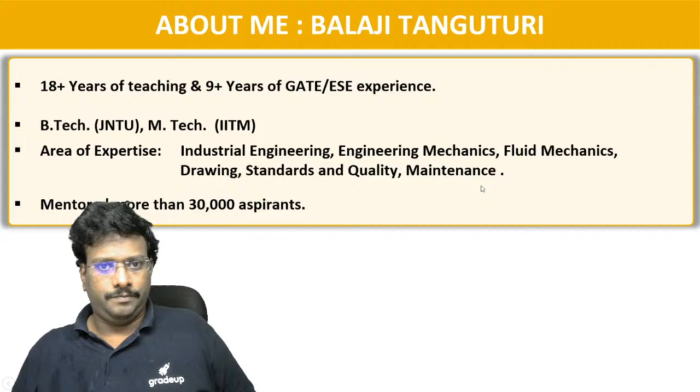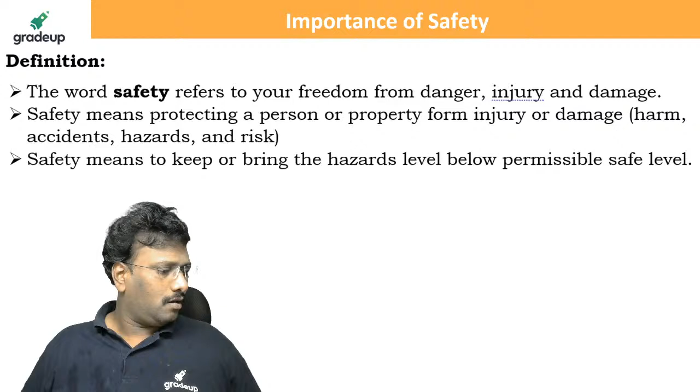Now first of all, we will move on to what is safety and where we are going to concentrate on these. What is safety? So just now I gave the information, just observe it.

So just have a look into this particular thing here. Safety refers to freedom from danger. Where the safety elements are required, we will discuss everything in this session, because I hope this part is going to be more or less related to the current situation in our world. So that is freedom from danger, injury and damage.

So danger is nothing but, just now you can observe, we are having a fear whether we are going to face a problem with COVID, it may lead to death also. So that is a danger we are going to get living in society.

Next one is injury. Whenever we are working under a particular organization, whether it is related to machinery or if it is a construction site, if you are not going to have proper safety guardings, then automatically it may injure the person. And in other places also, if you consider mining, if they are not going to make proper precautions as well as proper working conditions, it may cause death also. So all these things will come under safety.

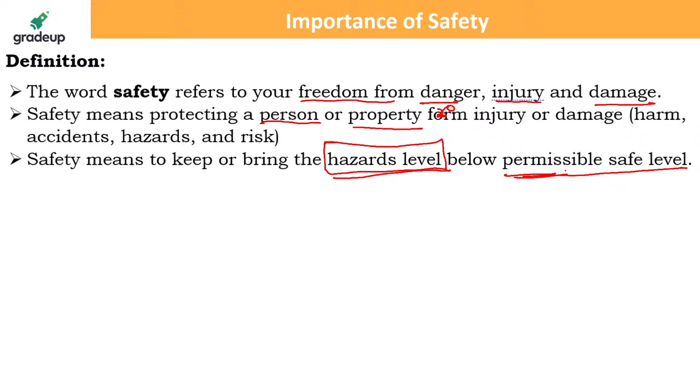So that is why we require that signals should not cross the allowable permissible value. So this is also considered a hazard which should be below the permissible safety level. Who can decide these safety elements, we will consider in the next few slides. So safety means keeping the elements, bringing down the hazard levels to a permissible level or below the permissible level. Now what are the various hazards we are going to consider?

Hazards are any source of potential damage which can cause potential damage or harm or adverse health effects. It is going to give permanent effect. Even you can observe the Bhopal gas tragedy is also one of the examples of it.

Adverse health, the health of the people are going to be affected. It is considered as a hazard on something or some person. So it is related to the environment, damaging the health of the people. Hazards are going to damage people, or the environment, or some particular equipment. It will affect or harm or damage someone or something. 'Something' means non-living things, 'someone' means living things, whether human being or non-human being. All these things we have to consider.

What are the various hazards we are going to consider? Just I am going to show some of the hazards here.

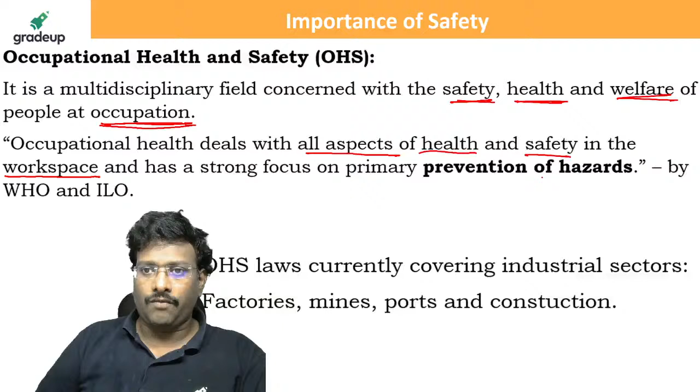Occupational health deals with all aspects of health and safety in the workspace. The major aim is a healthy workspace. The first priority is safety, the second priority is health. Both have to be considered, but first priority is given to safety, then we consider health also. That's why occupational means working environment.

It is for the primary prevention of hazards that are going to damage the people. Is it clear? Now, which industries currently come under OHS, occupational health and safety?

We got one question on this in a previous year ESE paper: which of the following industries does not come under occupational health and safety? Factories, mines, ports, and construction come under this, but they also gave agriculture as an option. However, agriculture so far is not considered under occupational health and safety. That is why wherever the word agriculture appears, that is the wrong answer in that paper. So remember, factories, mines, ports, and construction - these four are considered under the OHS law.

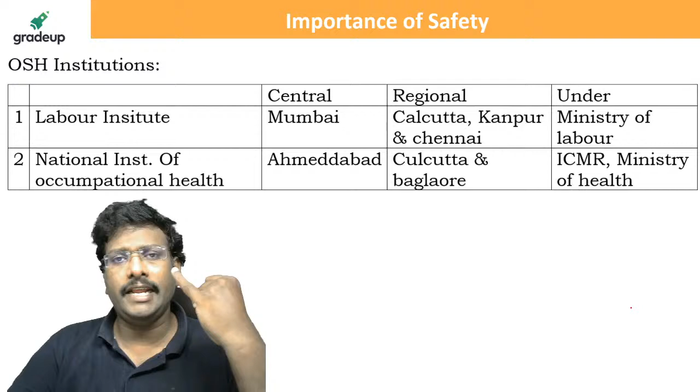Now, occupational health and safety is responsible for taking proper guidelines and forming rules for people working under various industries. Two things are there: one is related to the workers, another is related to their safety. Workers' basic needs in the working environment are taken care of, and rules are formed by the Ministry of Labor. So occupational health and safety comes with two units: one related to occupational safety, which comes under the Ministry of Labor.

Ministry of Labor, here the safety is going to come under occupational safety, it will come under Ministry of Labor. This Labor Institute office, the central office is located in Mumbai. Regional offices are there in Calcutta, Kanpur and Chennai.

And what about the health related things, they are going to be taken care of by the ICMR, Ministry of Health. You can observe whenever they make the COVID treatment, because one wing of ICMR is related only to occupation, but remaining wings are also there considering people's health. That's why if you observe, as per the ICMR guidelines, we are giving the treatment for COVID, meaning they decide what steps have to be taken, what treatments have to be given, and what insurance and medical policies the industries have to follow. All these things come under occupational health.

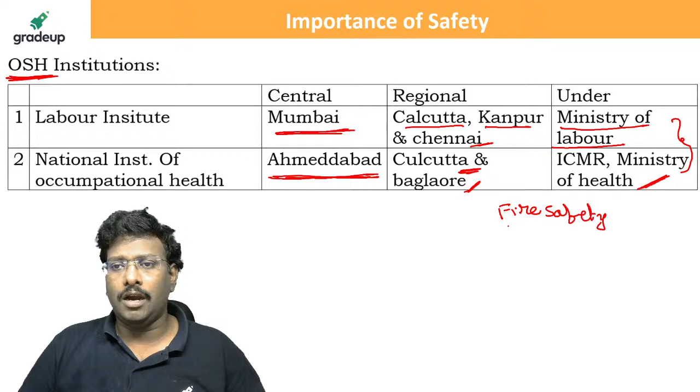First and foremost thing is fire safety. This is related to factories, minings and ports. Similarly, in construction also the safety is required, because most of the times you can observe accidents occurring at particular construction sites. People are injured because if they don't maintain proper safety precautions in construction, it may cause loss of physical elements like hands.

They are going to be injured, head injuries will come, or there is slipping on the floors and electrical shocks. All these things we can observe at construction sites.

If it is a fully completed building, electrical wirings are going to be inside, so no problem. But once it is open, if people are going to work under it, they have to work with electricity. The wires are not fixed, they are flexible, so once some particular insulation is damaged, it may cause electric shock to the people working in the area. That is why in construction work, we consider safety elements the most.

And while demolishing, in all these places safety is most important. First of all, we consider fire. Even if you consider colleges or buildings, even if it's an old building, nowadays in order to get permissions, they ask that fire exit should be there. If fire safety equipment and provision is not there, they are not going to give approvals.

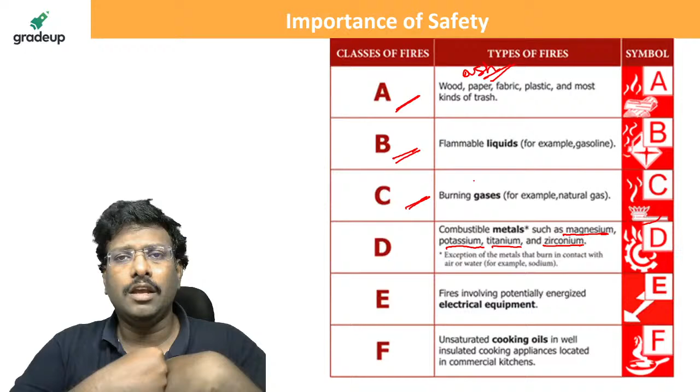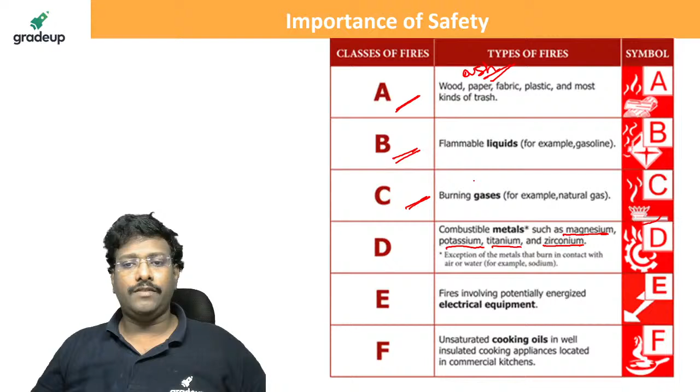Next one is E, the name itself shows electrical. So once, due to electrical shock, if the fire starts, or otherwise the fire is in the electrical zone, then what do we have to do? Can you use water? No sir, it can have high thermal and electrical conductivity, so it may damage the person who wants to stop that particular fire.

And another one is cooking flames, cooking oils. Once you can observe, even when making noodles, the flame is going to come on the bowl also. So that is related to cooking oils. Whenever they burn, what type of preventive things do we have to consider. So depending upon the

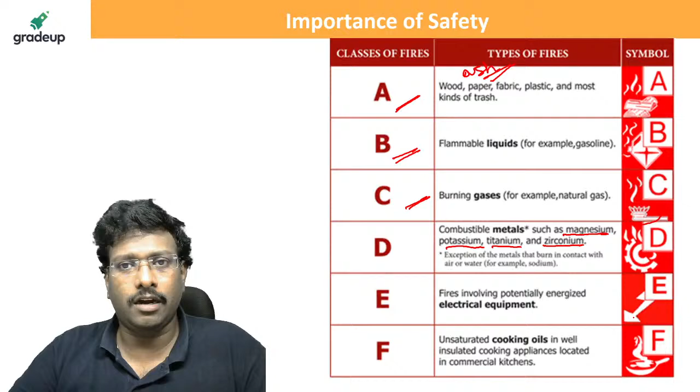area, we have to place the firefighting elements. Just observe - to stop that particular fire, we have to use different materials. So I am going to show here water, foam, dry powder, carbon dioxide and wet chemical.

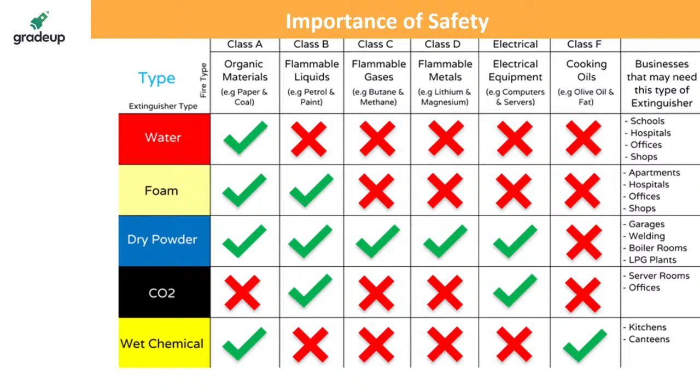Depending upon the application we have to use it. Let us consider the most common case: if it is electrical, if the fire accident occurred due to electrical, which elements should we not use? Foam should not be used, wet chemicals should not be used, and at the same time water should not be used. Either dry powder or carbon dioxide will be useful.

Have you observed dry powder, sir? Whenever forests are burning, at that time they go in a helicopter and throw some powder element onto the forest. That is nothing but dry powder. It can stop the fire quickly. So that is why dry powder is also considered one of the most useful elements. Except for cooking oils, in all remaining places dry powder is most useful.

Good. Now, especially I said in construction, accidents are going to happen. Why, sir? Because of slips - they are going to wet the walls for curing, so there is a possibility of slip occurring because it is not fully protected. That's why slip is going to occur.

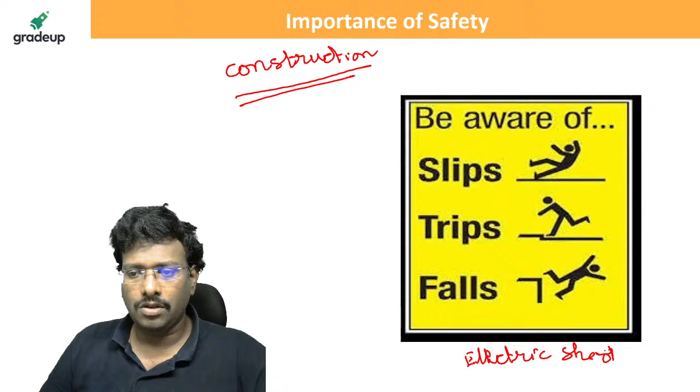Now another one is whenever they are working on digging operations, there are two types: excavation and trenching. Excavation is where the width is more and the depth is little less, so the protection required is not that much.

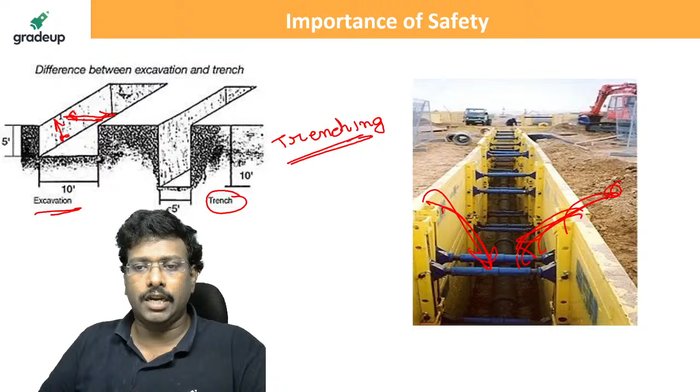Even if you observe pipe laying underground, we have to make a huge depth, maybe 10 feet also. That is called trenching. Whenever it is trenching work, protection is most important, because if it is soft soil, it can fall in that zone. If people are working under it, it may damage that person. That's why in trenching you have to be much more careful than excavation.

Next one is demolishing. There are two types of demolishing: non-explosive and explosive. Non-explosive means demolishing the entire building with the help of sledgehammers and drilling machines.

Another one is explosive demolishing, and there are two types. If there is a building and no other building surrounds it, we can make the blasting there, and the total building falls like this. This is considered falling like a tree.

Another one is explosive at the same place. If this is a building, they place explosive materials at different layers, and when they blast it, the total building collapses at the bottom only. It won't require taking huge safety precautions for this. This is called falling at the same foot, as opposed to falling like a tree.

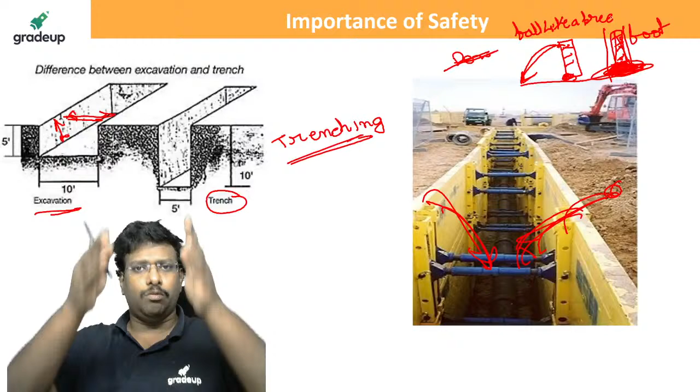So if the surroundings have many buildings and it would damage those people, they blast it so the total building collapses there itself. For this, they require more precision.

And next one is ergonomics. Whenever people work in a working place, ergonomics is most important. Don't think ergonomics is only related to offices, even in construction sites also they are considered. We will look into that element in the next slide.

Why is the ergonomic study required, sir? Ergonomic study is not only conducted here, they also conduct this ergonomic study in teaching. If you observe in colleges, you have a 50 minute session. Why, sir?

A normal student can grasp knowledge for a maximum of 50 minutes, because in those days teaching aids like visual explanation, animations, all those things were not there. In order to understand the element, they have to put so much concentration on the lecture. That's why if they put their concentration beyond 50 minutes, majority of the students' IQ grasping is going to be reduced.

How can they analyze this, sir? They place a camera surrounding them and examine depending upon their body language. They can observe whether the students are grasping the knowledge, just listening, or diverted and thinking of some other place. All these things are studied, and that comes under work study.

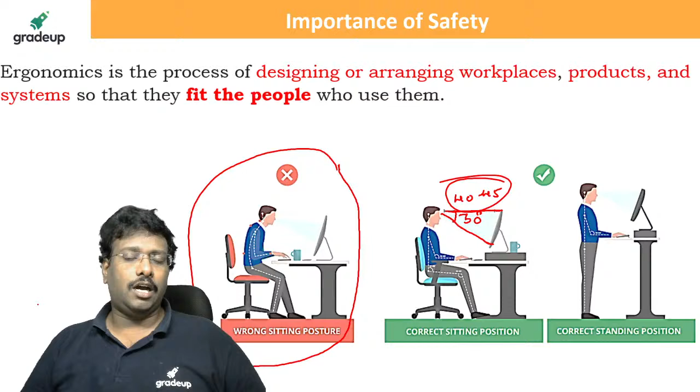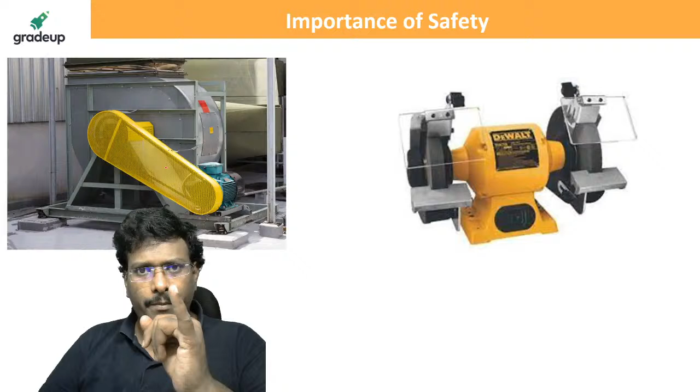Now we will try to concentrate on protection. This is related to working, but whenever you are working near machine elements, they have to provide safety guards. Like if it is a belt drive, if a person's cloth or body part is moving around it and gets caught, it may cause damage. That's why we have to give protection - it protects the equipment as well as the human being. If falling elements are there, once it falls on the belt, it may damage the belt or the motor. In order to avoid that, we have to give protection elements.

Similarly, grinding machines, whenever they are there, sparkles are going to come and it should not damage us. At the same time, it is a rotating object. If you won't provide this particular metallic grating or otherwise acrylic sheet, it may cause injury to the people. These are the safety precautions they have to consider in the industry.

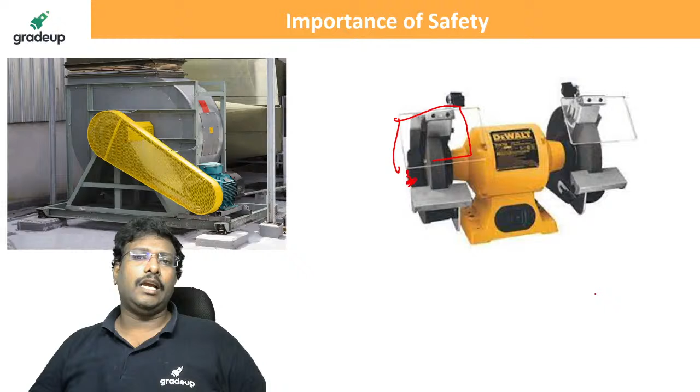Now we will consider some of the questions from it. Try to give the answer for this. Which of the following ministry comes under OHS?

Correct. Ministry of Health comes under it, and Ministry of Industries does not. Factories also do not come under it. And another one is Ministry of Labor. Labor is related to the safety point of view, health is OH, so therefore these two are correct. Ministry of Social Welfare also does not come under OHS. Therefore, 1 and 3 only are the correct elements.

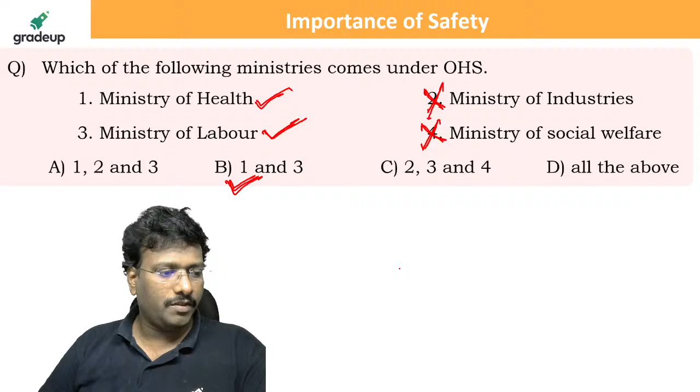Okay dear, now let us consider this. Which of the following hats does not provide protection from electrical hazards? They are going to wear the caps in the construction place. Which all are the things that won't come under this? Here, what is type A hat, type B hat and type C hat?

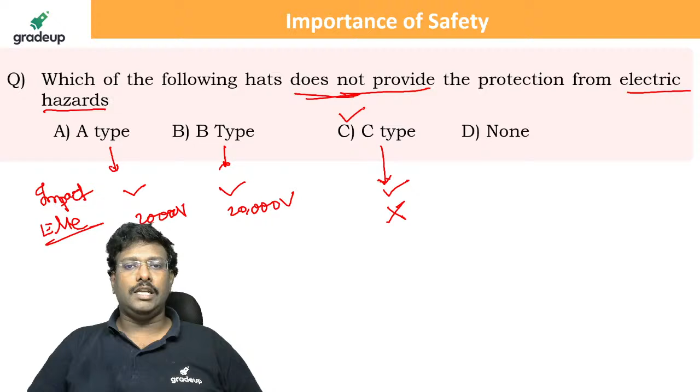Very simple here. These are going to bear the impact load, say if any bricks or something is going to fall, impact load, it can able to bear. B is also bears the impact load, C is also bears the impact load. But once you consider electrical energy, type A can bear 2000 volts only, but type B can bear 20,000 volts because this hat's resistance is going to be more. Similarly, type C is only for impact protection, it can't protect from electrical hazards. Therefore, the answer is C.

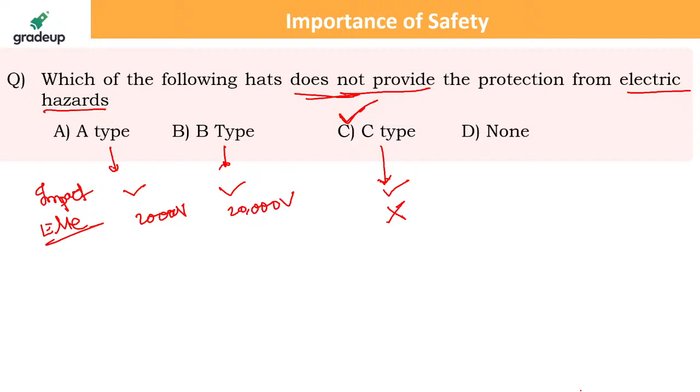Good, now let us consider this question. Primary concern with OHS is health of the employees, safety of employees, prevention of hazards and environmental safety. In the definition itself I showed here, this is going to be prevention of hazards. Overall, person to person, they won't check it out, they are going to consider whether in that particular environment the hazard levels are low or not.

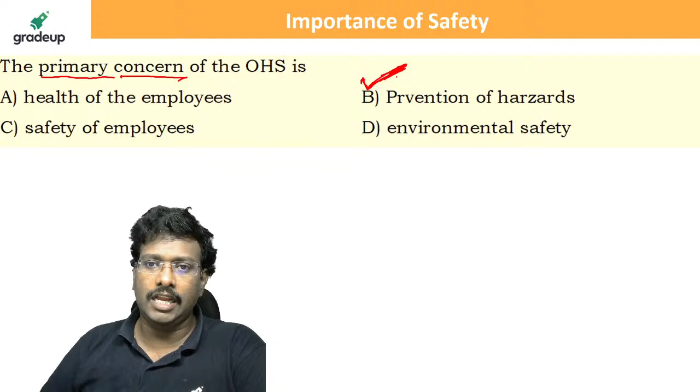Now you try to look into this. Which of the following construction work requires more care? Excavation, trenching, both, or none? Where we have to take more care - excavation means the depth is maximum 5 feet, width is 10 feet, whereas trenching is depth 10 feet, breadth 5 feet, almost rough values they are going to give. So in these two cases, we have to take more care in trenching than excavation.

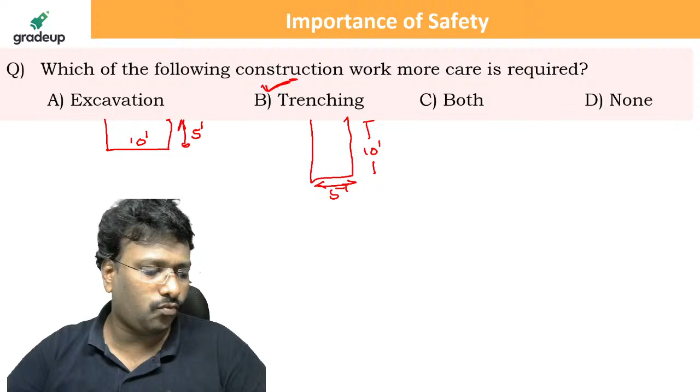Both are required, but as compared with excavation, we are going to consider more care in trenching, because the people working in that particular digging place, if it's less than 5 feet and soil falls onto the dug portion, it may not damage the people - they can escape. But once it is at 10 feet, a person's height is maximum 6 to 6.5 feet, so if soft soil falls, it may lead to the death of the person. Okay good, now I hope you can give the answer easily.

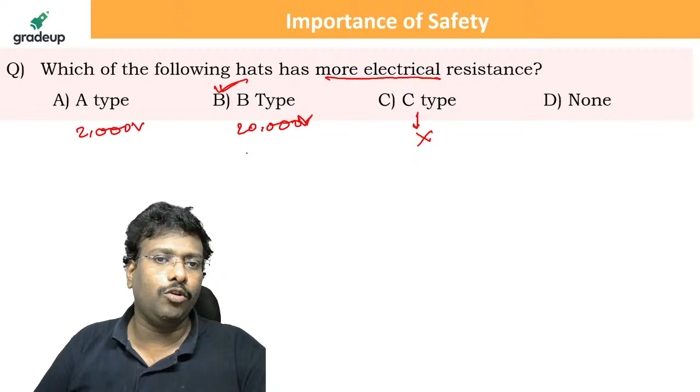Yes, your answer is correct, that is B. So which is having more electrical resistance? For A, it can bear up to 2000 volts, but B type can bear 20,000 volts, 20 kV it can bear. But C, there is no protection. So B is going to give more protection against electrical energy.

Now you try to give the answer for this. I hope, just now I gave this answer also. Labor Institute, OHS Central Office is located - Labor Institute is located, this one you easily remember here. Even you can observe now, the largest slum in the world is present in Mumbai, so the people there are going to do the works there. Therefore you remember like that, it is easy. In Mumbai, Labor Institute, Central Institute is present. Is it clear dear? So that is why the answer is D.

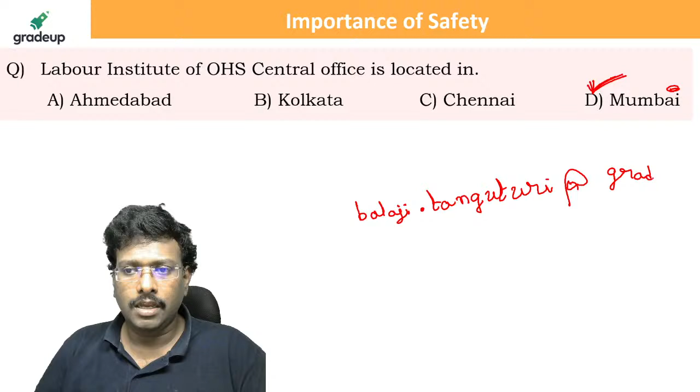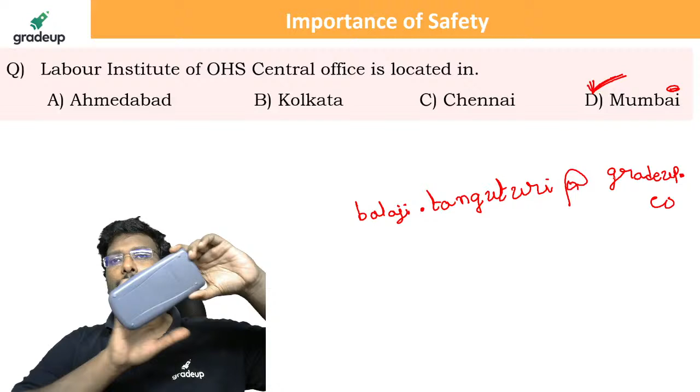So in the wall, if it is located here in the front view only, the true shape can be obtained whenever the surface is inclined or not. Here not the edge, so it is a photo frame, you may assume this is a photo frame. The surface is parallel to the wall, means VP. Even though if you are tilted, all the points are equidistant from VP. Therefore, in the front view only we are going to get the true shape here. But once the frame is tilted like this, then the auxiliary view will give it. But you are saying only one edge. So it depends upon the edge or surface, based on that we can able to get it.